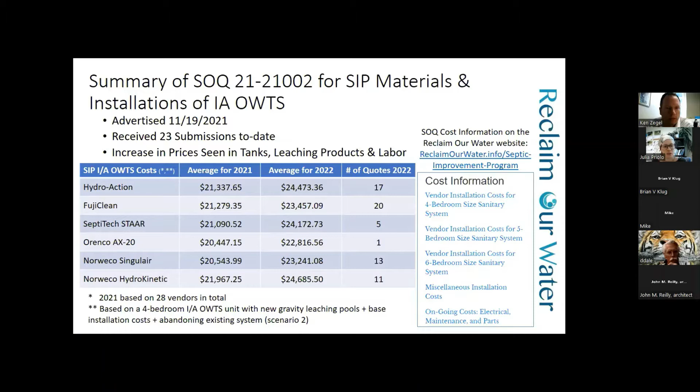The full list of 4-bedroom, 5-bedroom, 6-bedroom size costs are available on the reclaimourwater.info/septic improvement program website. These numbers you're looking at on the screen are based on a 4-bedroom IA unit with new gravity leaching pools, base installation costs, and abandoning the existing system - what we consider scenario 2 on our website. So that's what we saw, and we'll go over more later on in the presentation about what we're seeing now.

Lastly, O&M contracts and registrations. This is what we discussed last time, to revise Article 19 standards to minimize homeowner responsibility, to require the O&M provider to submit a copy of an annual O&M contract to the department, set minimum requirements for O&M contracts, including but not limited to a copy of the homeowner registration form as an attachment, signatures of both the homeowner and the O&M provider together, and the O&M coverage period explicitly written out as a start date and an end date. That's what we proposed back then, and it's still the proposal right now on the table, as we didn't receive any feedback that would reflect a need to change this.

The proposed approach, oh, sorry. I don't know if we can cover that.

And lastly, Accela Citizens Portal for IA systems. I'm actually just going to hand this over to Jen real quick to go over our update on where we are with our portal as we've been working to get this launched for you, the public, the stakeholders for use.

Yeah, so thank you, Julia. So this is going to be what we're ultimately using in order to implement that service providers will be the ones responsible for handing us over O&M contracts and inclusive of registrations from their clients. So this is currently in development now and testing. We have a contractor involved with creating this, so it'll be expanding our current database, which is used for wastewater management permits, to also be the portal that's going to be accessed for all service providers to submit O&M contracts, inclusive of registrations, as they renew and get new people on board with their companies. We expect to go live for this project in September of 2022, so pretty soon.

So to start out, we have a few slides on some background on PSD statistics, the standards, the approval process. Matt Gravina from our Office of Wastewater Management is going to run through some of these slides. Matt, I'll control the slide deck, just let me know when you want me to shift to the next slide.

All right, sounds good. So yeah, my name's Matthew Gravina. I'm a senior sanitarian in the Office of Wastewater Management. I supervise a lot of the work that comes in through the septic hauler information portal and a lot of grant applications on the residential side, the plan review, inspections of those.

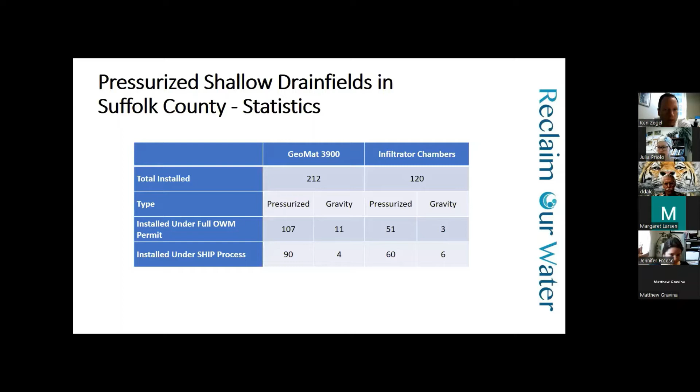So on this slide, you can see these are kind of the two most common trench leaching products we see in Suffolk County. You've got the Geomat 3900 and the infiltrator chambers, the quick fours. You can see the Geomats are a little bit more popular, about 200. You can also see the breakdown of the amount of pressurized ones versus gravity, and the installation through SHIP or the full application process. Pressurized is a bit more common, it reduces the footprint a bit, and it's about an even breakdown between full application installations and SHIP installations.

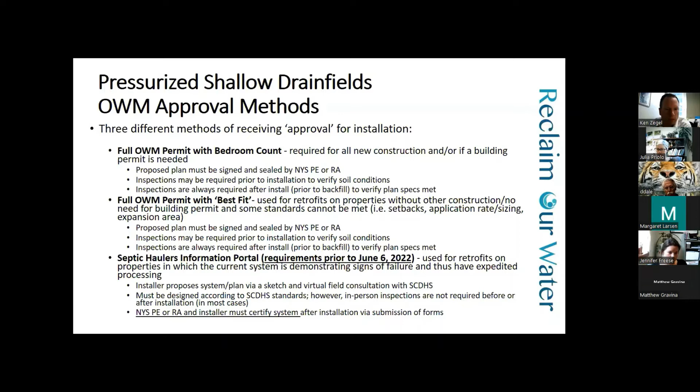You still need to have an architect or engineer involved, but they don't need to do full site plans. They're going to do a site consult, meet us on site. You're going to come up with a sketch, and then the architect or engineer is going to sign off on the sketch, and then they're going to sign off on the system after it goes in using our design professional certification form. Next slide, please.

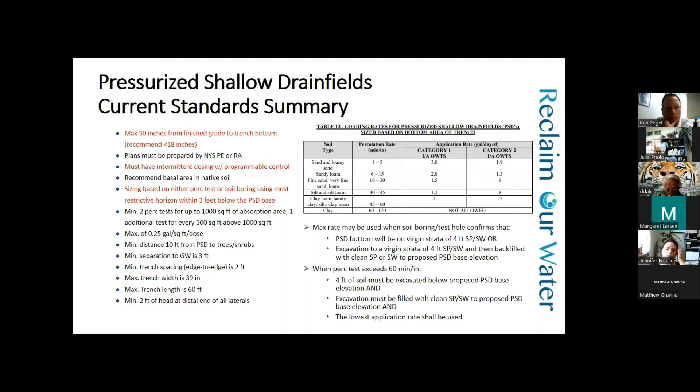All right, so Matt, I think this is where I'm jumping in here. So that gives some context on how we've been doing things with PSDs, the different approval processes, obviously the standards that guide those processes for approval. And so as we've been moving along here in the last few months, we wanted to take a hard look at everything that we do. The majority of pressurized shallow drain fields in Suffolk County are working well as designed.

However, we've been notified by some industry professionals of some failed PSDs, and we're just starting to investigate the causes of those failures, and starting to think about now, while we're still relatively young into the program, with the goal of eventually installing up to 380,000 wastewater upgrades throughout the county, replacing these on-site disposal systems, we want to take a look at it now to understand why some of these systems failed, and what we can do better moving forward to optimize their design, installation, and performance.

And that goes in terms of those 3 aspects, as well as operation and maintenance. We'll probably talk about operation and maintenance more so during the next meeting. But some of the things that we've seen so far is roughly 16 failures of the GeoMat 3900. 13 of those were installed through the SHIP process, so the expedited self-certification process. 3 through the full permit.

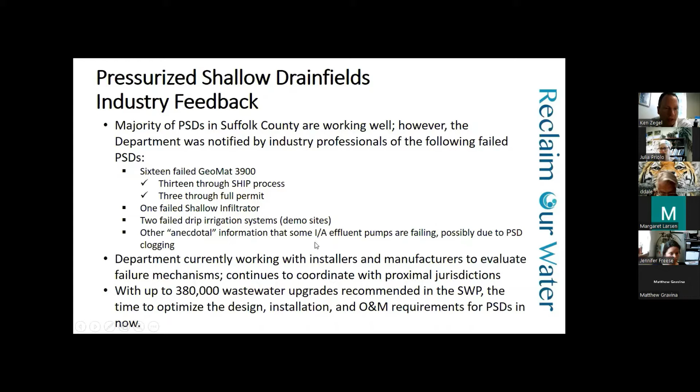If folks aren't comfortable sharing information in this environment, always feel free to email Jen, Julia, Matt, or myself at any time with anything, any follow-up. So just wanted everybody to know that the department is currently working with the installers and manufacturers to evaluate failure mechanisms. We're continuing to coordinate with proximal jurisdictions that have been using these systems for decades. And I mentioned before, most of them are working just fine, but now is the time to optimize things, hopefully before we start to ramp up towards the replacement of these 380,000 systems in the future.

So here's some of the things that we've done so far in response to this initial outreach that was made to us. The health department's made outreach to individual PSD manufacturers, as well as regulatory officials and technical experts in proximal jurisdictions that have been using these systems for a long time. Cape Cod, Rhode Island includes both some of the jurisdictions in Rhode Island, as well as folks from the University of Rhode Island. We revised our SHIP process requirements for PSDs. As I mentioned before, a significant portion of the failures occurred under SHIP. Matt's going to talk about that in a minute.

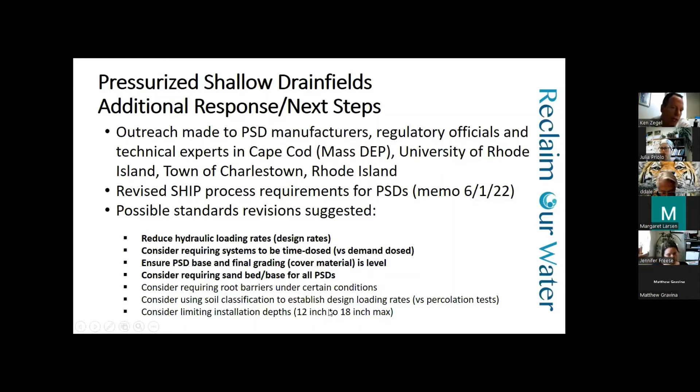And then after Matt discusses some of the SHIP process revisions, I'm going to jump into some ideas that we had based on input that we received from the PSD manufacturers, technical experts, and regulatory officials in our proximal jurisdictions. I'll talk about some of these possible standard revisions. And again, this is also where we want to get initial feedback from the industry in terms of some of these options that we'll take into consideration before our next meeting, where we come to some conclusions. All right, so Matt, I'm going to pass this back to you for the next couple of slides on a revision to the SHIP process.

Okay. Yep. So this was the memo we sent out to all liquid waste contractors in Suffolk County and a lot of the engineers, architects that we regularly work with. Next slide, please. So this is kind of the big change for our SHIP process. Preliminary plan sketch provided to Office of Wastewater Management must include percolation test or soil boring unless native soils are confirmed SP/SW down to 4 feet below land surface. Include the hydraulic loading rate and depict the minimum required PSD length based upon loading calculations; must be signed by licensed design professional.

So basically for all these sites now, we're going to need to have a test hole for all the PSDs that are going in through SHIP. You're going to have at least a shallow test hole, like 4 or 5 feet. And if you have SP/SW, you either need to tell us that you're going to excavate down to it, or if you don't plan on doing that, or you don't have SP/SW soil that you can connect to, you need to put those perc tests on the plan that you're submitting to us for SHIP approval.

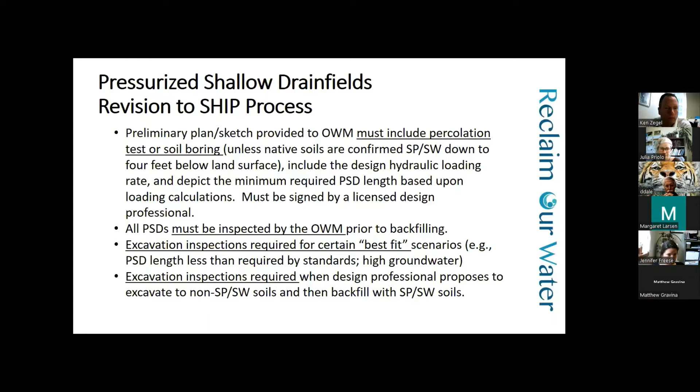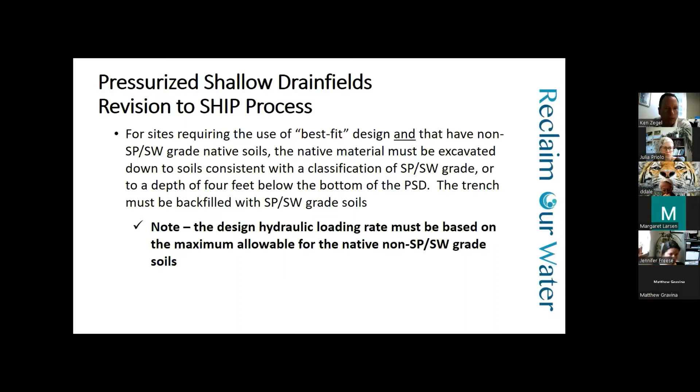Okay, and that is what I just said. So that is what we're talking about, best fit. We're talking about not meeting the minimum size or some kind of issue with setback to groundwater. So if we let some stuff go through SHIP that we wouldn't normally approve on a regular application, maybe you're 4 feet to the property line instead of 5 feet, something like that, that shouldn't trigger this requirement to do SPSW soil, extra 4 feet underneath it. This is just in cases where you have kind of an undersized leaching area. All right, next slide.

So Matt, I'll jump in here again and talk about, so that's some of the stuff that we've done so far. And by the way, if anybody in this meeting has not received that memo, feel free to reach out to email Matt or myself, and we'd be happy to email you a copy of that memo.

So now I just want to talk about some possible revisions to the residential standards. Again, I would love to hear some input afterwards in terms of concerns or suggestions or different options. One of the things that we're going to, this is kind of low-hanging fruit, put directly into our standards solely to make it explicit is basically what Matt just said. This is something that we put in the revised SHIP guidance memo in terms of the requirements for best fit and what's required in terms of excavating down to SPSW and how the system should be designed in terms of loading rate.

That's an easy one. But other things that we've heard from some of these proximal jurisdictions and some of the experts, and these are again just ideas, I'd say the top four that potentially have the biggest impact would be revising our hydraulic loading rates, our design rates; considering systems to be time dosed versus what we're doing right now, which is demand dosed, and I'll explain that in a minute; ensuring that the PSD base material and final grade cover material is level, that was pointed out by several folks as being very important to PSDs in terms of ensuring that there isn't preferential flow at the base of the PSD; and considering requiring a sand bed or base layer for all PSDs as opposed to just putting them on native soil.

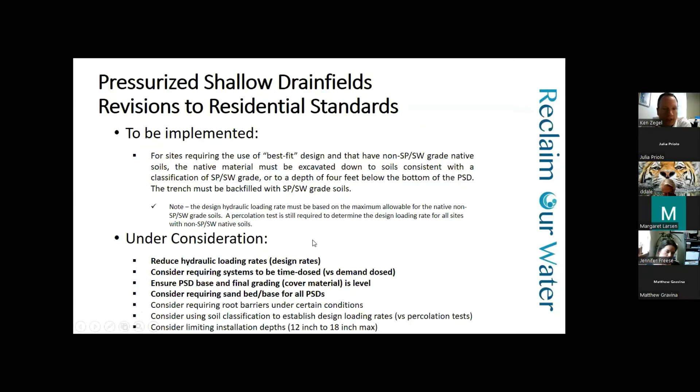Then we have category 2 IA systems, a little less on the effluent quality, but still provide some level of protection over, say, a conventional system in terms of the effluent quality, so lower loading rates than category 1.

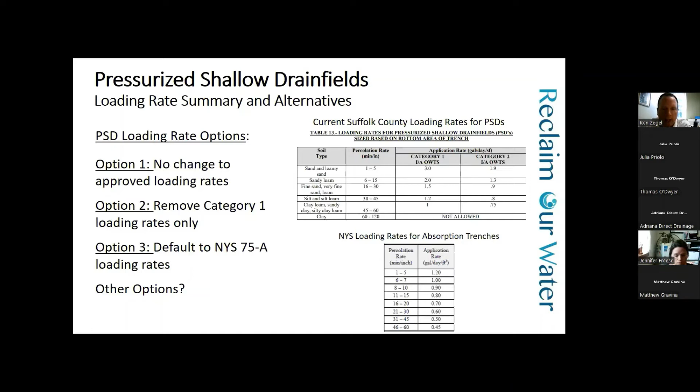So I'm going to talk a little bit about something else that we heard from some of the experts at University of Rhode Island and others on time dosing versus demand dosing. And I'm not going to spend too much time on it. I'm just going to set a primer here for everyone, get maybe some initial feedback, but then, as you'll see in a minute, really gather some additional information and do a little bit of evaluation. We'll talk about this again during our next meeting in the fall.

But just for quick context, our current practice right now relies generally on what's referred to as demand dosing, and that means that the PSD is primarily solely dosed on demand when a certain effluent level is reached within the IA system's final chamber, or if there's a separate pump chamber, within a pump chamber. So once it reaches that float, the pump turns on and doses the PSD. There's some benefits to this, obviously. It's a relatively simple design, relatively small footprint, lower upfront capital installation costs.

But what we've heard from some of these other experts that have been doing this for 20 plus years is that it can create dosing conditions that are conducive for the development of what's referred to as a biomat, which, once that biomat forms, can significantly reduce the absorption capacity of the system and result in failure of the system and or more frequent O&M, which on the back end is just going to be an overall increase in costs, whether it's just O&M or if the system itself has to be replaced because the absorption capacity can't be recovered.

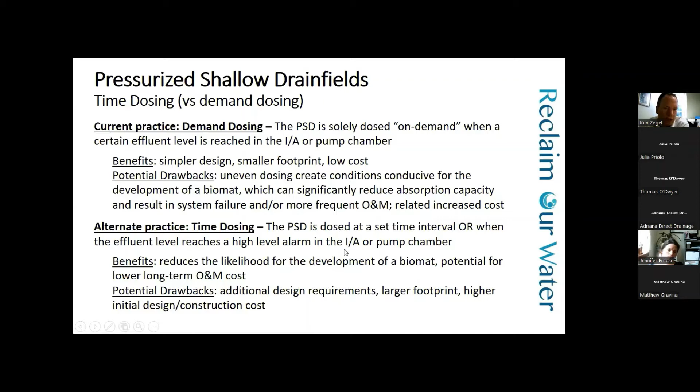So a few options, and like I said, I don't want to spend too much time on this one today. I do want to get some initial feedback from everyone, but also let everybody know that this is just a start and the department's going to be doing some next steps. Potential options: no change to the current requirement, what we're doing right now. Option two, time dosing only required for certain site conditions. And these are just some examples, sites where it's best fit.

I know this sounds counterintuitive, but best fit where there's no expansion room. The counterintuitive thing is, well, if you require an additional tank, then that's counterintuitive. But if at the end of the day it results in the maximum efficiency and operation of the PSD, well, then that's a positive thing for a small site.

Potentially requiring it only for certain soil types, soils that don't percolate or absorb very well, and/or only for certain loading rates, if it's decided that loading rates should be revised. And then on the extreme end, option 3, requiring time dosing for all sites at some point down the road.

Some next steps we were going to do internally at the health department: additional outreach to the experts. We want industry input, either today and/or follow-up email or discussions. But at the end of the day, probably the biggest thing is, what's the relative cost benefit of doing this under real world situations? What is the real world increase in construction costs? What is the potential long-term cost savings? What are the real world implications to sites with limited space? And what are some potential other implications?

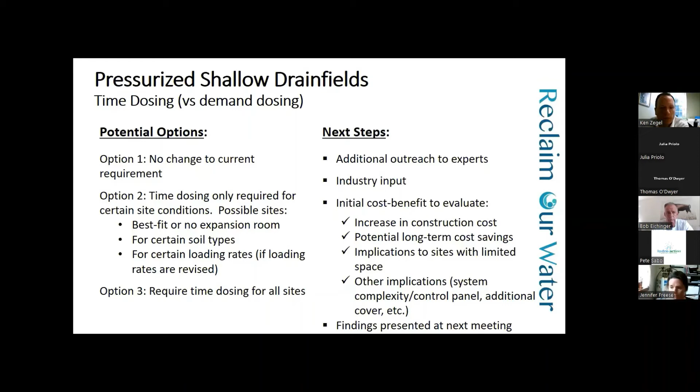All right, so I'm going to keep going here in the spirit of time.

So again, this is something we've heard from different manufacturers and also folks at other proximal jurisdictions, really just reminding us that for PSDs especially, it's just a different world compared to leaching pools, with a lot more tolerance in leaching pools to be a little off level, or the soils to be a little different. But one of the things pointed to our attention is that the relative levelness of the base material and the final grade is important to PSDs.

So, what's the best, most economical way all around to make sure that you're getting a level base material and final grade? Because we all know how construction projects go, especially on the final grade end. I don't know that we necessarily have full control over what the final grade is going to end up being once landscaping's done and this and that's done.

So some potential options we just brainstormed internally here: no change to our current inspection or final approval process. Another option would be DHS inspection, just confirming the levelness of the base and final grades, possibly with something as simple as a laser level. Nothing extensive, relatively simple, but just some sort of level of QC.

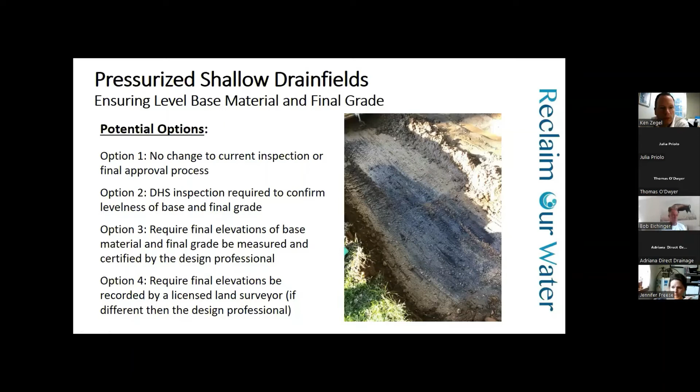All right, if there's nothing else, I'm going to keep going. Again, it's spirit of time here.

So base material requirements, this is definitely one that I heard mixed feelings from experts versus the industry, and maybe some contradictions. Current practice is PSD is installed directly on native soil. Generally there are certain cases where it may not be, that Matt talked about before.

Lower cost, optimized treatment. From a treatment perspective, everything we've heard is it's optimal to have the PSD installed directly on native soil. The only potential drawbacks we heard from the industry and internally was that if the soil is a silt or a clay or some sort of tight material, then you're not getting any additional quote unquote storage volume for effluent that goes into the system. If it was sand or gravel, that could provide, in the pore space, some additional storage volume potentially.

And native soils may or may not be more difficult to level if you're truly supposed to be putting the PSD on virgin, native soil that's not smeared or disturbed, so to speak, to the least extent possible. Then it could be a little more difficult to level.

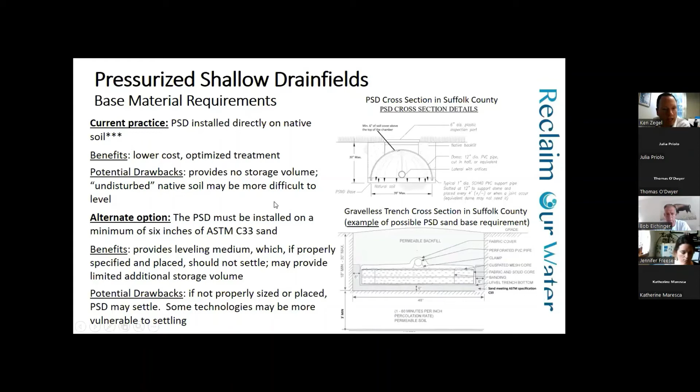Okay, so I'm going to keep going here again in the spirit of time. We have a lot to get through. And I'm going to buzz through these relatively quick again, hear any initial comments, and then if, again, email us or feel free to pick up the phone. Happy to talk as well if you're more comfortable with that. But so just some other considerations, again, things that we've heard from recommendations from some of the experts and other jurisdictions and the manufacturers as well.

So potentially requiring root barriers under certain conditions. I can tell you that we saw at least one system that the holes in the distribution pipe were plugged with roots. So we know that that is a realistic thing that can happen. So potentially requiring root barriers under certain conditions, not necessarily for all systems.

But again, on number 2, potentially, this is again came from Rhode Island, using a different soils classification system to establish design loading rates versus percolation tests. And I think they might use the USCS. Jen, feel free to correct me if I'm misspeaking on that, but that, in their opinion, doing that specific soil classification method provided the most accurate means of determining the soil's absorption rate. In their opinion, even above a percolation test, interestingly.

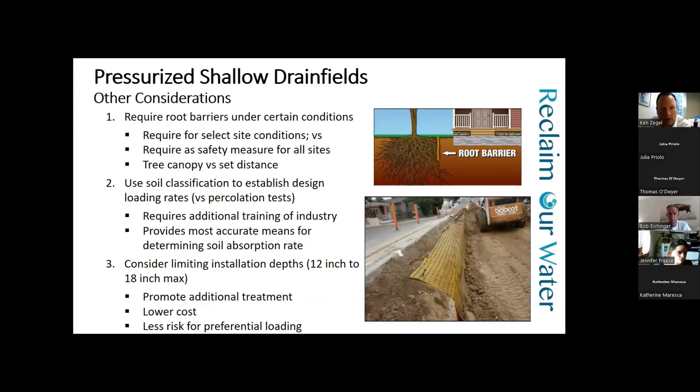All right, that being said, I'm going to continue moving forward. Oh, I apologize, one more thing I wanted to mention on pressurized shallow drain fields. This is something we noticed at one or two sites. For folks familiar with the septic improvement program, we currently allowed projects that didn't have a test hole to use a test hole from an adjacent project site. I think Office of Wastewater Management staff were even helping uncover those. That was to save money and maximize grant funds on the installation.

But we've seen at least once, and it's fresh in my memory because it just happened, that the site next door that we used was SPSW, and then the PSD system installed on the adjacent property was all silt and clay. So that's obviously a problem. And if percolation or absorption rates are part of the loading rates and part of the concern for certain sites, then using borings from adjacent sites might be a contradiction.

It was with the best intentions, but based on the lessons learned, we're going to not allow that practice. We still have additional discussions with our law department and others to confirm that we can allow these as qualifying costs in the program, so from the homeowner's perspective, the test hole or percolation test could qualify for reimbursement.

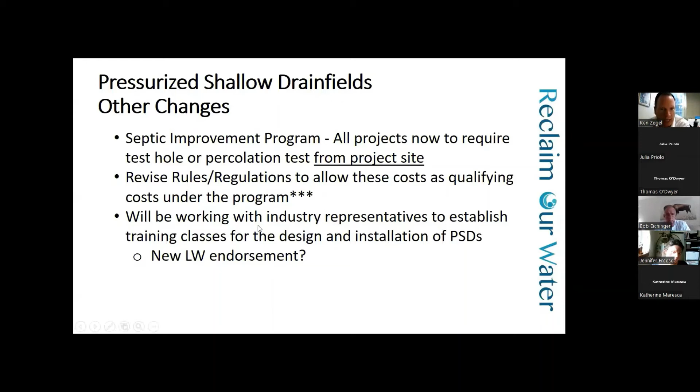So now, take a quick moment again to pause. If there are any other industry questions, observations, or concerns anyone wants to mention on PSDs, is there anybody out there that has any thoughts? Again, if you're not comfortable in this environment, that's fine. Feel free to call or email us.

We've heard some anecdotal statements that some of the effluent pumps on some of the IA systems were burning out faster than anticipated. The pressurized shallow drain field wasn't confirmed to be clogged, but there was a theory that could have been the cause. Anybody else on this meeting have other observations from what you've seen in the field or heard? And again, if you're not comfortable, feel free to follow up with us separately.

I guess I'll add, effluent pumps aren't a one size fits all system. Every PSD system is different, how many laterals, how long the laterals. The larger the system, you need a larger pump. We're designing everything for a 5-foot distal head, equally dispersed through all the orifices. So making sure the right, correctly sized pump was installed goes a long way. If the pump can't achieve that distal head and you're getting slower velocity through the PSD laterals, you could be more prone to clogging or other problems.

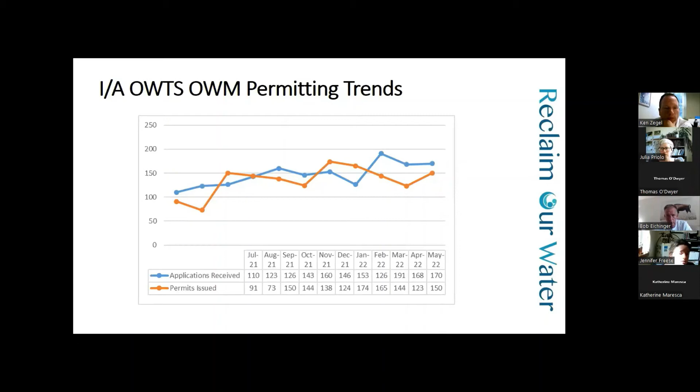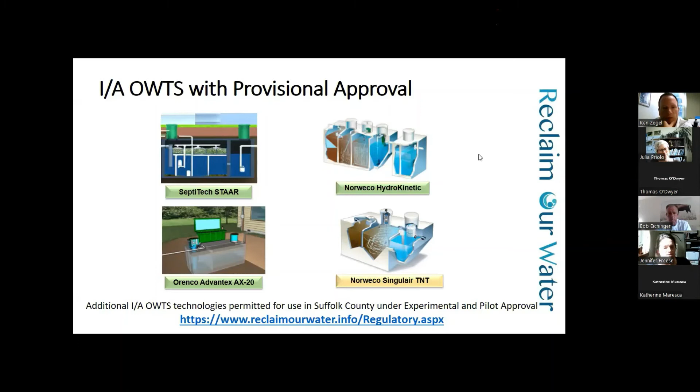We have our 4 currently provisionally approved systems: SeptiTech STAAR, Orenco Advantex AX20, Norweco Hydrokinetic, and Norweco Singulair TNT. All are able to be installed here in Suffolk County on an unlimited basis. We also have additional technologies that can be installed under our experimental and pilot phases of approval. Those do have limitations on how many can be installed, but you can go on our website, reclaimourwater.info, to check those out if you'd like to get involved with some of the newer technologies coming into Suffolk County. Next slide.

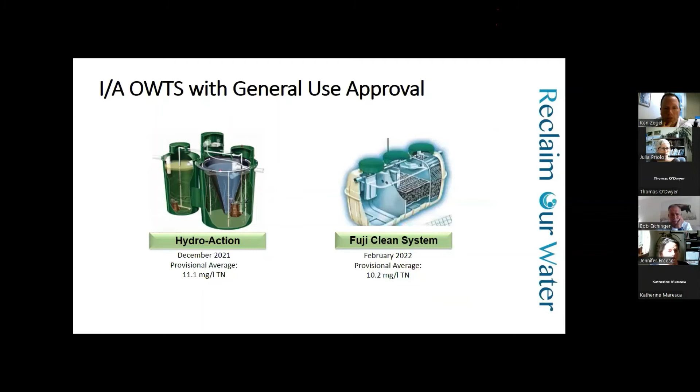Moving on, we have our 2 generally approved systems for residential general use. Hydro Action was granted general use approval in December of 2021, and their average of the first 20 year-round residential systems was 11.1 milligrams per liter of total nitrogen. The FujiClean system was generally approved for residential systems in February of 2022, and their average was 10.2 milligrams per liter total nitrogen. Next slide. We also have some proposed standards revisions relating to IAs beyond the PSDs we already talked about.

So those 3 have to do with the first being commercial IA design to require manufacturer or vendor certification. Number 2 would be to update the minimum requirements for system covers and risers. And number 3, to establish requirements to immediately address odors meeting the definition of a public nuisance. Move on to the next slide. So we're going to go into each of those now.

So the first, commercial design requiring vendor certification. So the commercial IA designs we're finding require components that are not utilized typically for residential systems. And depending on the proposed site use, these components might be necessary to achieve the required treatment level, so that 19 milligrams per liter treatment. This is basically saying that every use of a commercial system varies and the waste stream produced by that use varies. And some of these components will help to reduce BOD, TSS to limits that are more conducive to treatment, that more represent what you would see in a residential waste stream.

So moving forward with this standard revision, we would be asking IA designers to submit proposed plans to the vendor to receive a sign-off prior to submitting to the Office of Wastewater Management. Basically, that's going to give the vendors an opportunity to recommend various components that they feel might be necessary based on the waste stream that you're proposing for. We want this to happen as early in a project as possible to avoid delays in OWM approval process and also potential delays in purchasing of an IA unit.

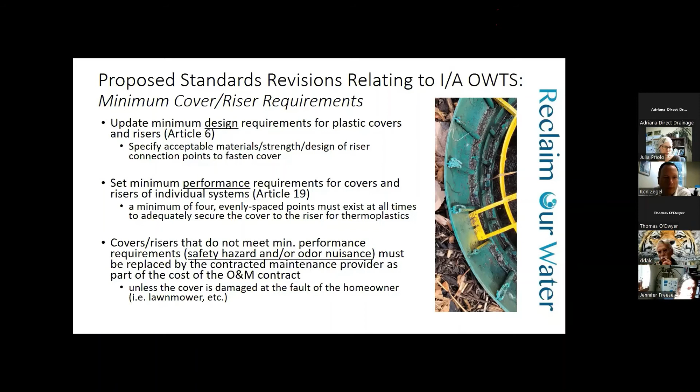So as discussed, some of the issue also with those covers is that we're getting odor complaints from some of the systems. Of course, every system we'd love to be working perfectly. There are some systems that have issues and produce odors. The system itself should be able to control those odors and put them in places where they are not considered a public health nuisance.

So here you can see, this is just from our local sanitary code, Article 5. It lays out that basically a public health nuisance constitutes a nuisance which, in the opinion of the commissioner, may affect health or is the cause of such nuisance existing elsewhere. So there is a piece in the sanitary code that allows us to address nuisance complaints that aren't a direct public health threat, and odor complaints will be held under this and addressed as required.

Yeah, and Jen, I think initially we were thinking that this cover, as we move forward with the best path for coverage, should take care of most of this. Some of the sites that we've gotten complaints about, as Jen mentioned before, our best guess was it was related to the covers, but it's something, as we move forward, if 380,000 of these are going in the ground, we want to be on top of, and relatively simple to address, I think, at the end of the day.

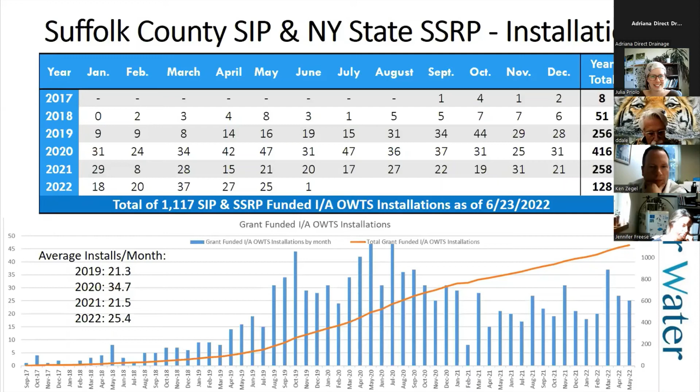Over 1,000 IAs installed with grant funding. We do know there's approximately another 1,000 on top of that that are installed in Suffolk County without the use of grant funding. But you can see this spring has been, I'm sure you installers and manufacturers here have noticed it as well, quite a busy spring in regards to IA installs, which is great. We still have only what, 379,000 left to go, but we're making headway, obviously.

And then just an update on where we are in regard to grant funding, because we cannot move forward with any grant issuance until we make sure that we have that grant funding to back us up. Recently, Suffolk County SIP was awarded another $4.5 million towards this program. And so now we have sufficient funds to issue over 400 Suffolk County SIP grants, likely to take us through the beginning of 2023. And as I mentioned, a request for the third disbursement of New York State SSRP funding has been made to New York State.

Here are some numbers. Over 11.1 million of the county SIP funds have been paid out to installers to date, with over 19 million of the total grant funding allocated to grant awardees. And over $10.5 million of the New York State grant funds have been paid out, with over 17 million of our total grant funds allocated to grant awardees. And I have broken down here, we keep track of the funding, as well as how many more grants are left, with their approximate timeline for full allocation of grant funds, all the numbers.

And then I just wanted to do a quick recap. Back in June 2020, as we all remember, after months of really high increased level of installations during the pandemic, the initial SIP funding and first round of New York State funding was fully allocated to grant awardees. The funding was exhausted, and during that time of limited funds over the next 12 months or so, we were able to issue about 108 SIP grants, but that was only when grant funds became available. For example, if someone withdrew.

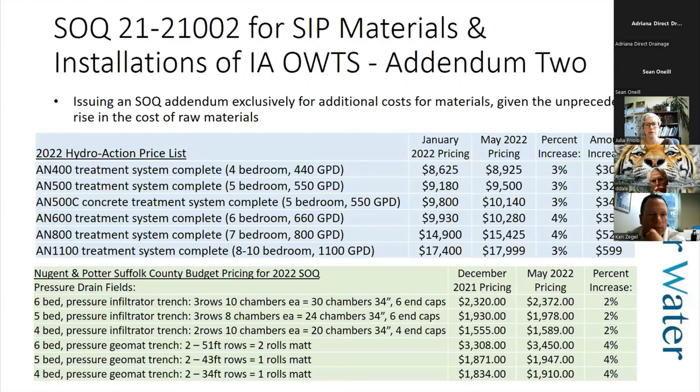Here's just a quick example of some of the documentation we have received from the industry documenting there has been an increase in prices, and we want to give that opportunity to vendors to provide new year one quotes on their quote sheets through the end of 2022 - that's supposed to say 12/31/2022. We do expect this addendum to be issued around July 1st. We're going to get it out as soon as possible.

Certain line items can be updated, and they're going to be clearly described in this SOQ. For example, total cost of IA unit materials, line 1, retail price of IA - that's something that can be updated and resubmitted. However, we do require documentation of updated pricing that needs to be submitted for each one, just proving understandably where you're getting these numbers from and what's the need for the update. But we understand that there is a need for that.

This is in addition to the option that all vendors have to update their year 2 price quotes by the end of the year for the 2023 year. An example of acceptable proof of increased prices would be the updated Hydro Action and Wastewater Works price quote sheets. When the SOQ addendum is issued, we will send out a blast email. Please feel free to contact me if you feel like July 1st has come around and passed and you're left in the dark - make sure we get it out to you.